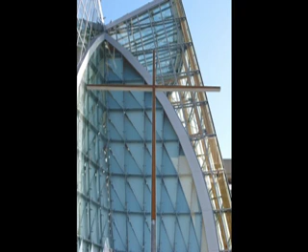When I began work on this project, Bishop Cummins and subsequently Bishop Vigneron challenged me and my colleagues to conceive of a work of architecture that truly reflected our place in time, a cathedral that reflected the cultural authenticity of our place here on earth at this moment. This was a provocative challenge, suggesting a building that is very contemporary on one hand, yet also respects 2,000 years of Catholic architectural history.

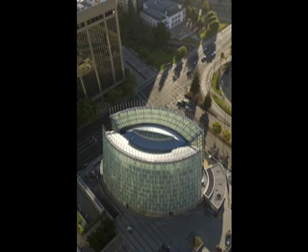Specifically, here we are in Oakland, a city of great cultural diversity and richness, perhaps one of the most multicultural cities on earth—certainly nothing like the monoculture that existed when the great cathedrals we think of in Rome, Paris, and London were built.

So looking at the site itself, it is an extraordinary place. It is right at the northern tip of Lake Merritt, and it is a hinge, if you will, between the natural world and the urban world.

We wanted to orient this building specifically to capture the length of Lake Merritt. If we could orient the building—and you'll see when you look at it, it's slightly twisted—it turns from the grid of the city toward the natural realm, facing almost due south. This is a very important nuance of the site design itself.

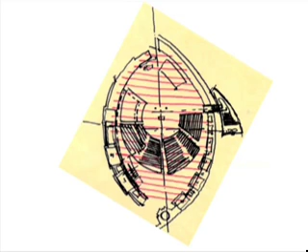So once we had these ideas—the intuitive notion of fluidity, the programmatic idea, and the liturgical idea about the relationship to the altar—the question was how to bring geometric rigor to that idea. We began experimenting with interlocking circles, and found, to our great delight, a shape that has fascinated mathematicians for many centuries.

Early mathematicians saw this as a sacred geometry—this shape that creates the pointy ellipse, the Vesica Piscis, or mandorla, thought of as a transition or threshold of change between inside and outside, between entering one space and another. This became a very powerful metaphor and the founding principle of the building's geometry.

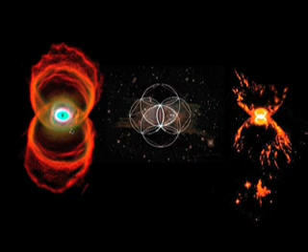We see the intersection of the circles, the Vesica Piscis shape, reflected in this recent photograph taken by the Hubble telescope of a star nebula—again the same intersection and idea of the Vesica Piscis shape. We also see this in early Christian symbols used to indicate secret places of meeting. We've taken this idea, enlarged it, and brought it into the actual geometry of the building itself.

Within this, we have secondary geometries taken from the larger organizing geometry to locate, for example, the baptismal font at the main entry, the altar at the other end of the main axis of the cathedral, and following that same axis, another Vesica Piscis shape containing the Eucharist and tabernacle, and finally the Eucharist chapel itself.

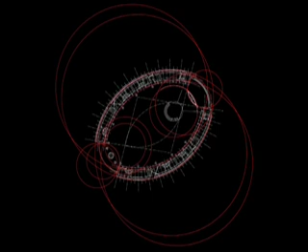So then the issue was, how can we bring this into the third dimension, just as the great cathedrals we're so familiar with did, in which geometry became the overall defining structure for the spaces themselves. So we made these three-dimensional spheres, made of circles of the exact same diameter you just saw in the plan.

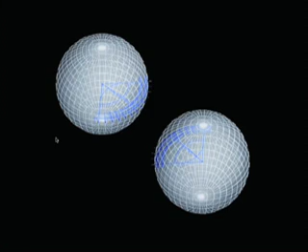We bring these together and cut them in a way that begins to form a self-supporting structure, which results in two spherical shapes, two spherical segments that form the sanctuary itself.

The idea taken further was to embed these two spherical segments within two conical segments, and the two together could be laced together to form a composite structure, a very lightweight but very rigid and sturdy structure.

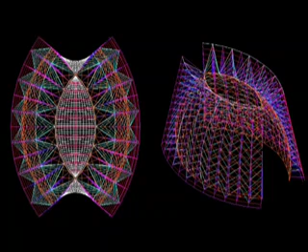So an intuitive idea here was to make this inner segment of these spherical segments of wood, and to then encase these segments of wood within conical segments of glass, creating two glass veils that become the skin of the structure.

The idea of the square within the circle is a very powerful Asian symbol, the idea of heaven and earth brought together. Heaven is expressed in the circle and earth in the square. The square itself, the altar, is of white Carrara marble.

This marble comes from the same quarry that Michelangelo, many centuries ago, quarried his stone for his sculptures. So this forms the very centroid of the building itself, and about this we have the congregation arrayed, the choir, and the clergy, all part of the same community.

At the end of this, as we spoke earlier, we have the reliquary wall, and at this point on axis the Eucharist is held, and behind this the Eucharist chapel we see here in plan.

You'll notice right away that from the altar emanate a series of radial cuts, and these are side aisles that cut all the way through the reliquary wall itself.

This is a very important both physical and metaphorical point, because it connects the city through the wall to the altar. It also connects the lake directly through the wall to the altar. So we brought the natural realm and the urban realm directly through, focused on the altar itself.

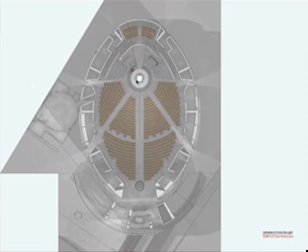This baptismal font is directly on axis with the front door, the main doors, and the pilgrim's path beyond in this drawing. As you recall from the early discussion about the site plan, the cathedral itself is turned away from the main axis of the city to metaphorically bring it in alignment with the natural realm. So this long axis of the cathedral is on the long axis of the lake.

This allows us another very interesting nuance, which is as a parishioner, as a visitor arrives at the cathedral, one comes first to the baptismal font, very important liturgically, and then you physically turn from the city to the sacred axis itself, the axis of the main altar.

Finally, other nuances within the plan itself, you can see these cuts through the wall which reveal openings to reconciliation chapels, which are cut on the two sides here, directly adjacent, a very important connection to the water of the baptismal font.

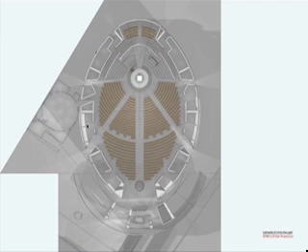And then other chapels that are cut into the reliquary wall itself, which are colored volumes within. These are meant to be very intimately scaled, smaller volumes within the larger volume of the cathedral itself, places of intimate worship and places where we think various cultural nuances will take place over time.

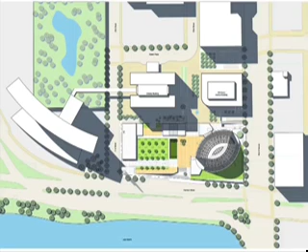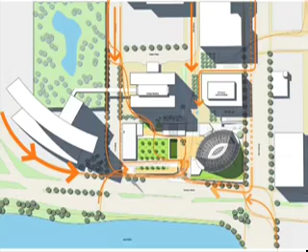We have taken great care to bring together the city and this cathedral complex through the use of these gardens, which are open to all. The idea is to allow people to move through the gardens across the cathedral complex itself, up the Pilgrim's Pathway, down the civic stairway, connecting to the lake, to make this woven into the very fabric of the city of Oakland.

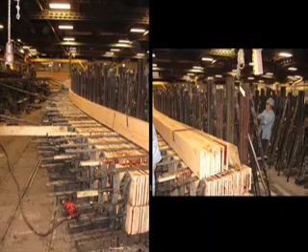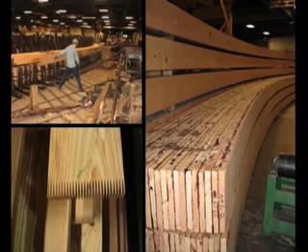We're looking at the components that make up the weave of the wood and the glass. The wood comes from Oregon. You see it here being fabricated. This is, of course, a renewable material. Because it's so thick, it's called heavy timber, and it will not burn in a fire. It will actually char, and it's safer than steel in terms of its combustibility.

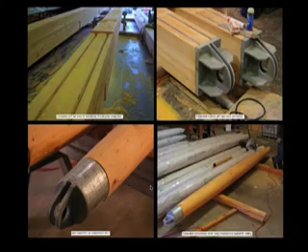So this is an extremely good material to use for an important space like this. And of course, we know of temples in China and Japan that have been with us for 500 years or more, made of wood, although exposed to elements which this cathedral is not.

You see the various structural components here, one of which is this vertical, or post, the compression piece that helps to knit together the veil wall and the exterior glass wall.

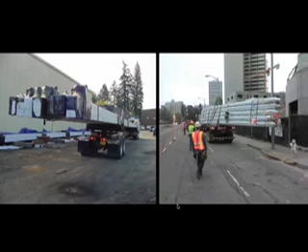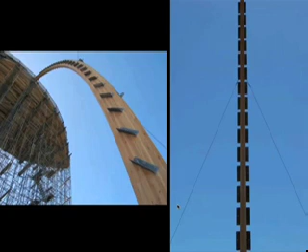Here we see the ribs being trucked to the site. These were the longest elements that could be trucked on our interstate highways, 110 feet long. They were then erected, as you can see, up against the Vesica Piscis tower scaffold form, which certainly was one of the more unusual moments in Oakland's history, when this was floating above, free of the site.

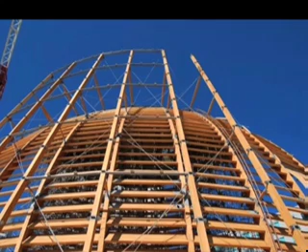But you can see how the ribs connect, and when brought together, they form a compressive ring, which is then laced together with the exterior volume to create this very tensile, very rigid structure that's extremely lightweight. Here we see the wood struts and the steel tensile rods that tie it all together.

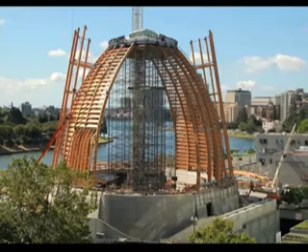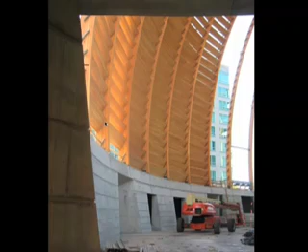Certainly one of the most rewarding moments was when we were able to walk in and see that, yes, indeed, the light really does glow on this wood. We'll see times of the day with this very glowing quality, and other times when it's very much in shade and shadow, always changing depending on the time and season in which you experience the building.

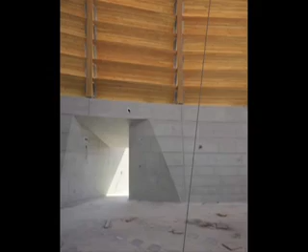The glass itself is made up of layers adhesively brought together, laminated. The inner layer is a very light translucent film, and then we have ceramic fritting, which creates this pattern you can see on the outside of the building. This is a very intentional geometric pattern that conveys the fact that it's made by man, and yet it has a kind of organic quality.

The importance here is that it creates a dappled quality of light within, and through the translucency it allows us to collect light on the backside and make a very luminous, ephemeral, always-changing exterior veil, if you will, for the building itself.

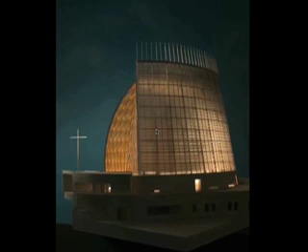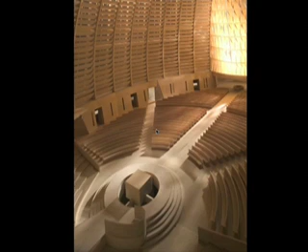Just to show you briefly some of the process of design, we build with models. This is an early study model of the cathedral itself, looking at the side wall and inside the building. Here you see again the altar, the square altar within the circle. The circle opens again to bring light down with glass, in this case down to the mausoleum below, and the cuts through the wall to the exterior, making that very strong connection.

A view of the early model showing how we first thought of the oculus ceiling, and the way it's shaped to bring light down specifically onto the omega wall. At certain times this light will rake the omega wall. This is always changing, never the same. So we looked carefully at this.

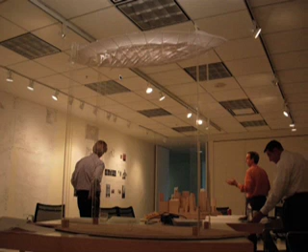We carefully studied these elements in model form, as you see here, looking at the way we can introduce perforations to make a sense of depth in the wall or the oculus ceiling, while at the same time bringing direct light into the space, washing the altar, washing the omega wall, and then ultimately the pipe organ.

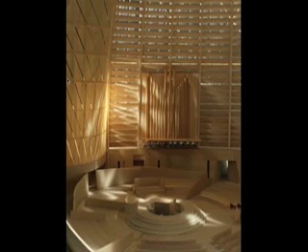Considering how we might bring within the building a representational image that is not stained glass. Stained glass, of course, in our earlier cathedrals were really pictograms, designed to convey biblical stories to occupants who were not literate. Today we have a different situation and know these stories. But the idea of having a representational image of Christ was very important to Bishop Vigneron, who was very interested in making sure this happened within the building.

So our intentions were to find a way to make this happen while really making it part of the architecture. The idea is to make a pixelization of an image of Christ projected through the architecture itself, through the diagrid that is the Omega wall.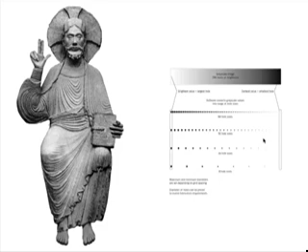We translated this to an algorithm using the computer, into bits and bytes and then finally into pixels. These pixels are rayed through a variety of sized openings, from 1/4 inch to 1 1/4 inches, 144 gradients, giving us a grayscale that allowed us to create an algorithm recording the darks and lights of this image.

Through this, we were able to create the beginning images of this figure. As you stand farther away, the figure becomes more clear. As you get closer, it dissolves into an abstraction of a dot pattern.

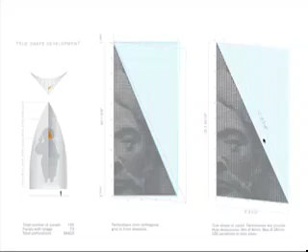We did this by constructing a series of plan drawings first. These are prints made by our computer in our office, printed at full size to see if we could begin to think this was really going to work. We weren't sure, it was quite experimental. In fact these algorithms had just been developed by us. We had never done this before.

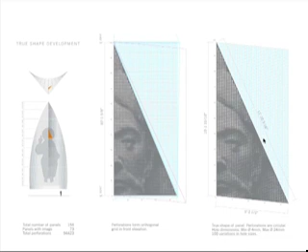Once we became convinced this could work, you can see the size of the square of the triangle in this drawing, and in context in the overall Omega wall. A typical triangular piece is 10 feet high and about 5 feet wide.

So we then said, we think this will work. We made a large-scale mock-up in our office, used our laser cutter to construct a piece of this, cutting a piece of plastic. It was too big, we had to actually stick it up through the ceiling in our conference room. But we stood back and saw it and became joyfully convinced that this was going to work.

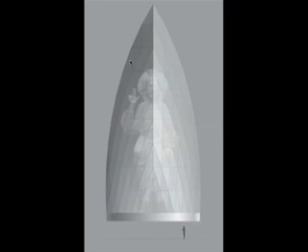We were confident enough to invite Bishop Vigneron and other members of the clergy, and at that moment decided yes, this will work, let's make this the principal image within the cathedral sanctuary itself. So we proceeded. It was still quite an experiment, but you can see it today.

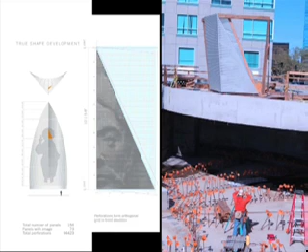The day we arrived to look at mock-ups, especially for the Omega wall, was a beautiful day, but a bad day for viewing art. The reason is that to look at the Omega wall, we have to see it with bright light behind it, as you see now in the sanctuary, and less bright light within on the face. So I warned the bishop and our colleagues walking in that this may not be the greatest viewing.

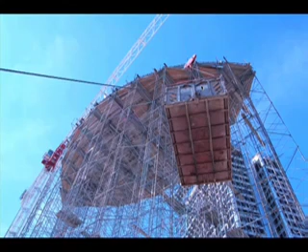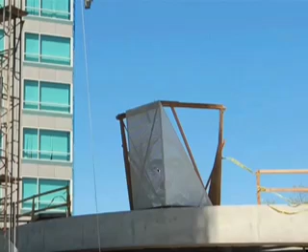Sure enough, we walked in and it was a disaster. You can see one of the diagrids here with Christ's face on it, and all that's really perceivable are these blobs. This was an awkward moment. But the contractor said that that morning it had been much more effective, and suggested lifting something up to cast a shadow across the face. So we found a 12-ton dumpster, lifted it up in the air, cast a shadow across the face, and sure enough, out of this emerged this extraordinary image of Christ.

As you can see within the building itself, this experiment turned into perhaps one of the most extraordinary parts of the cathedral itself.

So thank you for sitting through this somewhat long explanation of the ideas within this building. I hope that some of the ideas, which may be somewhat obscure to the casual observer, are now much a part of your understanding of the structure. So again, thank you, and I hope that this experience and the experience of using this cathedral will be a source of richness in your life.